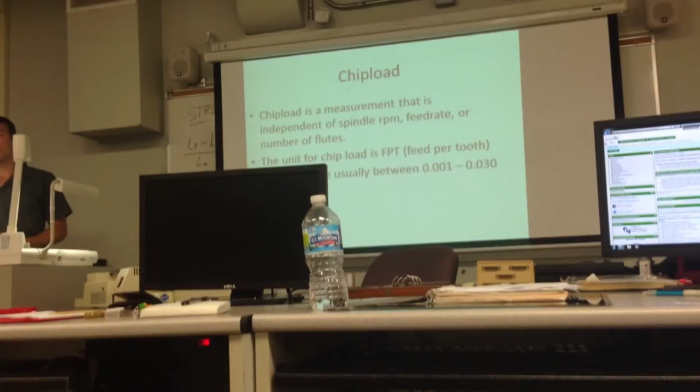So chip load is how big of a bite each tooth takes, right? So if I've got this cutter and it's got a chip load of 1,000, that means each tooth is going to take off 1,000th of the material. So if I turn this, it's got 4 teeth - if I turn it one time, it's going to take off 4,000th total, because it's based on the tooth. So basically it tells you how hard the tool is working. So obviously if I'm taking a 30,000th chip load with the same tool, it's going to be working a lot harder than a 10,000th chip load, unless your tool's huge - if you got a big tool, it's alright. Don't try to do that with a 1/8" cutter or something, you're gonna break it. Yeah, that would mean like one revolution. No, that's not gonna work.

So the chip load varies with the size of the tool usually, so you'll see that a lot in the charts. If it's a smaller tool, it's gonna have a much smaller chip load. Like if I'm using a 30-thousandths tool, I might not even use 1,000 - it might even be a half-thousandth chip load. But you got to remember that thing's spinning a lot faster too, so you can cut a lot - the feed could be a lot faster with a smaller chip load.

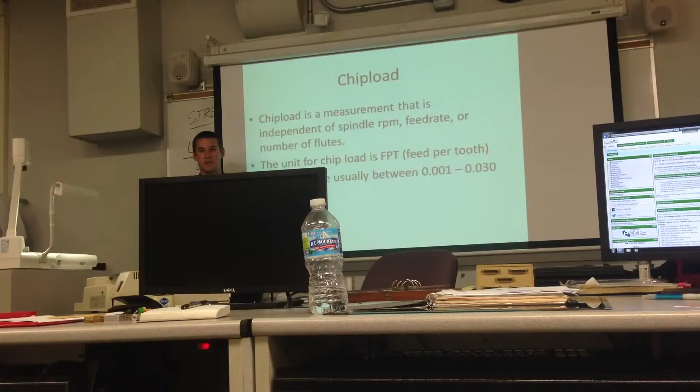No, the higher chip load means your feed goes up, because what's the formula for feed rate? I lost my paper in that computer lab. Feet per revolution? No, feed - inches per minute. It's the number of teeth, right? Number of teeth times the chip load times the speed, right? I don't know if it's in that order on whatever you're looking at, but that's usually what it is. So that means if my chip load increases, they're all multiplied, so that means my feed must increase. So IPM, inches per minute, is your feed rate - that's how fast you're feeding into the material. Okay, we'll get to that.

So surface feed per minute - what are we talking about here? What's the surface feed per minute?

You guys remember where I was talking about the cars going down the highway? So if I'm driving in my car, I'm going 60 miles per hour. My wheels in my car are spinning, right - say my wheels in my car are, I don't know, this big. There's the wheels in my car, and I'm going 60 miles per hour. Right beside me is a big old semi-truck - it's got a huge wheel, and he's going 60 miles per hour too. He's getting the same surface speed - we're going the same speed. And then I got this little smart car behind me, and it's this big, but it's still going 60 miles per hour. So this is what we're worried about - we're worried about how fast you're actually moving across the surface. So 60 miles per hour, that'd be what, 5,280 surface feet per minute?

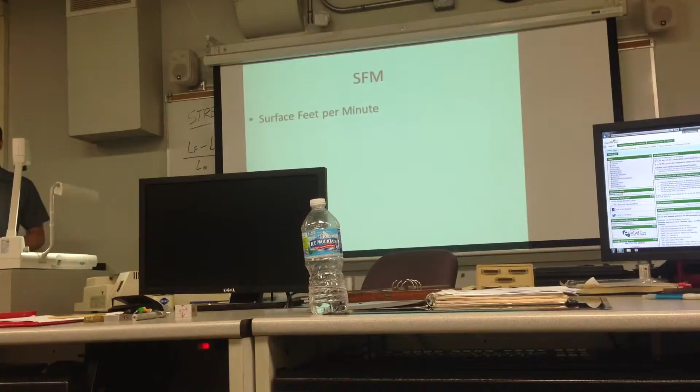So going back to that first equation, what's LL for again? We'll get to that, don't worry about it. We'll get to that. Okay.

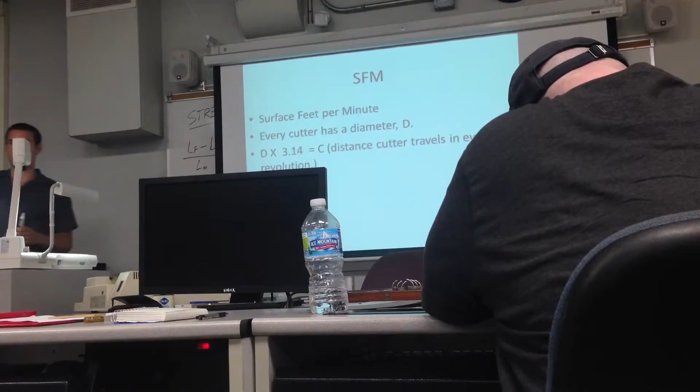So every cutter has a diameter, right? So that's our car wheels over there. We have 3 different diameters. And you multiply that by 3.14, you get the distance it travels. So we're talking about the rotational now. And the surface feet per minute is just how far the cutter edge travels in 1 minute. So you're thinking about that cutter edge traveling a linear velocity in 1 minute, and that's what the surface feet per minute is.

And you'll see on the chart anywhere from 20 surface feet per minute all the way up to 3,000 for some crazy materials.

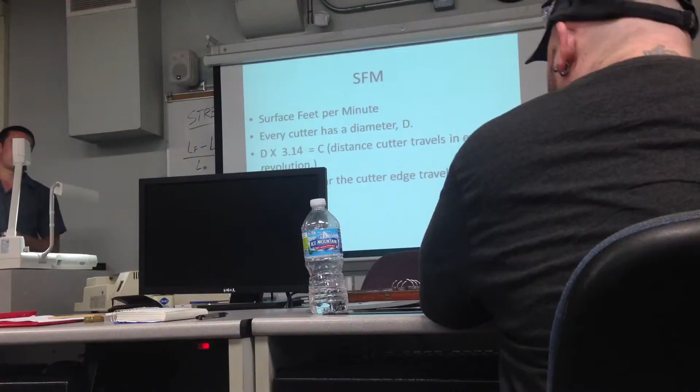Are we taking a break anytime soon? Yeah, after we finish this. Then that'll be the last time.

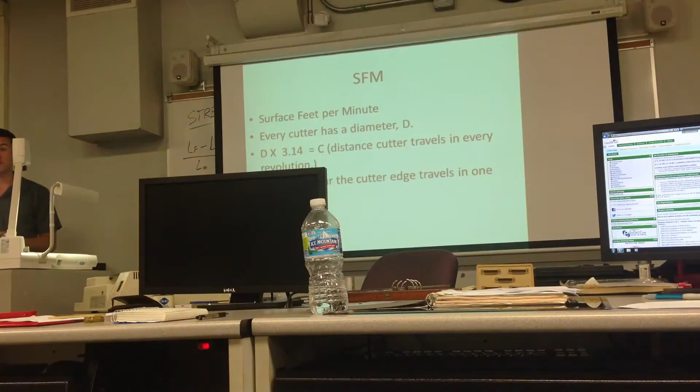Sorry, so just remember to think about that as how fast one tooth is moving across the surface. Just think of it that way. It's easy to remember, it's okay.

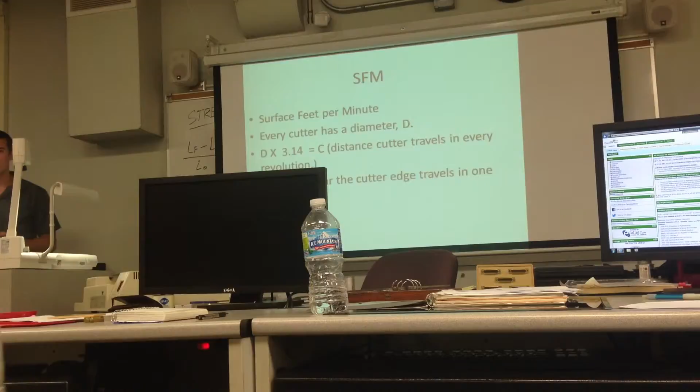So when it's on the lathe, that tooth, it's actually dependent on how big the diameter is of whatever you're cutting. Exactly. Okay, so I kept thinking it has to do only with the tooth. No, it has to do with whatever's rotating.

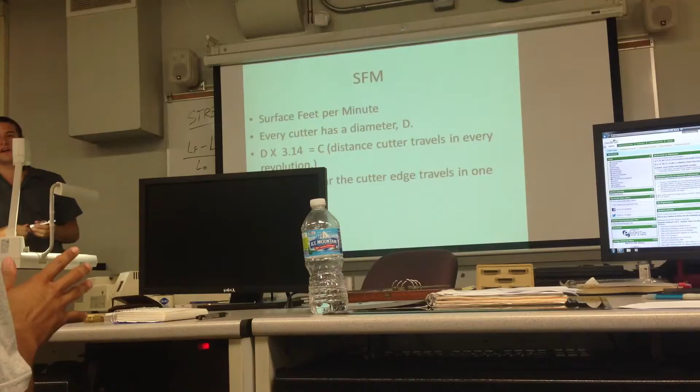Like that. That was scary. Thought the school was getting blown up.

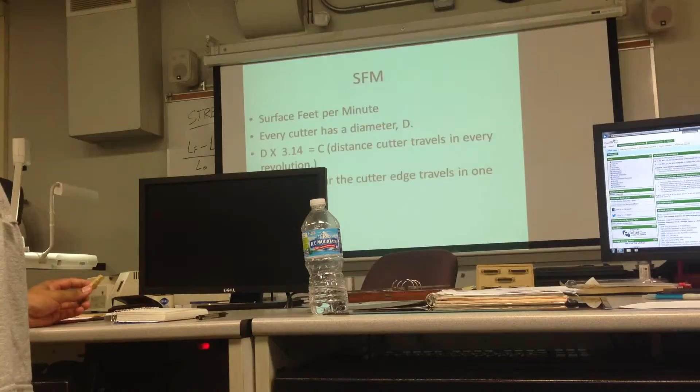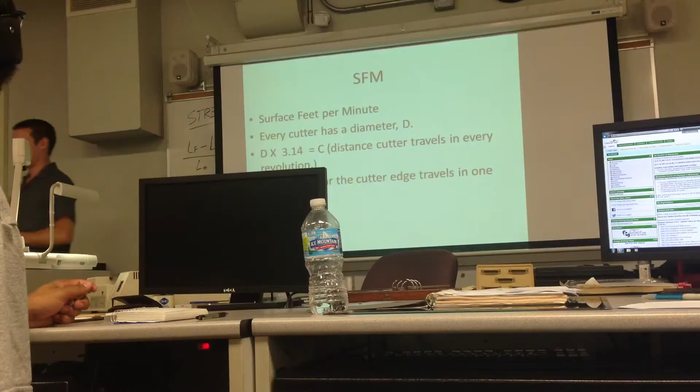So what's surface feet per minute? It's the speed that your tool is moving across the material. So if you were to think of it like a chisel, like I just got a chisel and I'm chiseling something, if I take that chisel and go fast, or if I go slow, that's what your surface speed is. So the faster you go, the more heat you have, right? The slower you go, you have a little less heat.

So if you look at this chart here, kind of hard to see, it's small, I get it, but that would have been nice. You have your surface speed per minute right here. It's going from 10 all the way to 1200, 2000, right? So 10 to 2000, and across the top you have diameters. And what you see happening here is like at 10 surface speed per minute...

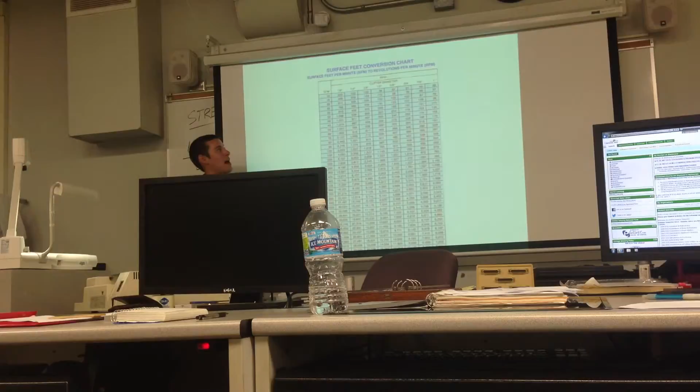depending on the diameter, your cutting RPM's going to change, right? So if I'm using a 1/8-inch tool at 10 surface speed per minute, it's going to be 305 rotations per minute, right? But if I go up to a 1-inch, it's only going to be 38. So the tool diameter has a lot to do with how fast you're spinning your tool. So on the outside, it's not going to be going as fast as if it were on the inside, surface-wise.

So that brings us to spindle speed, which is the RPM of your machine. So the RPM of the Bridgeport, the actual tool spinning, or the RPM of your lathe piece spinning towards you or away from you. And that is your surface speed per minute times this constant.

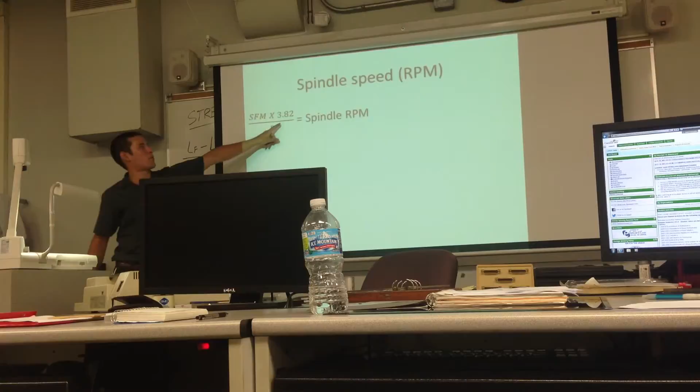I was trying to read into that thing too hard. Too much, man. So let's do an example here.

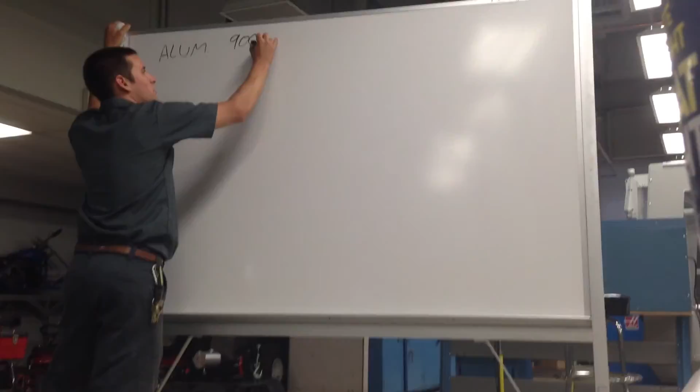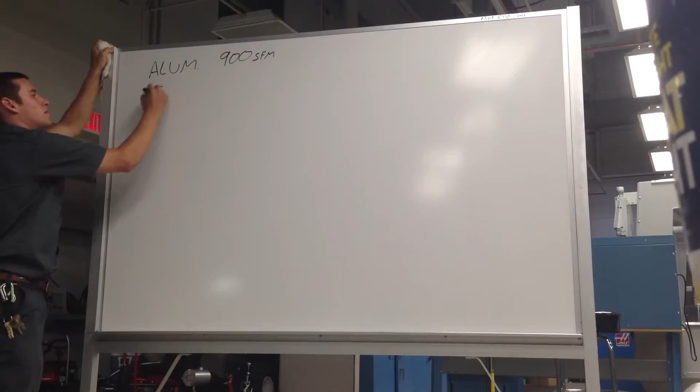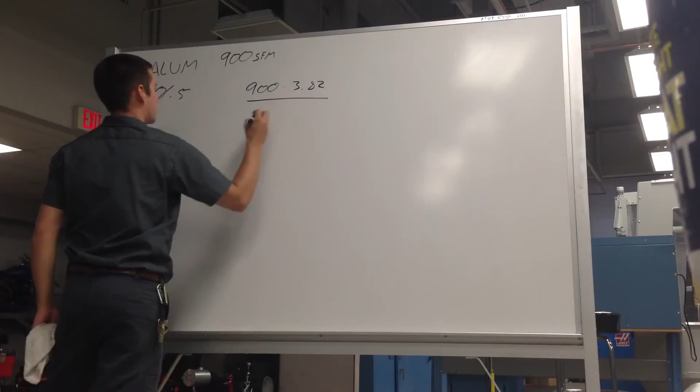We want to cut some aluminum. The cutting speed we looked up in the chart for our tool was 900 surface feet per minute. Let's say we're using a half-inch cutter. So all you do is plug it in: 900 times 3.82 divided by 0.5, and that should give you your RPM.

What is that? 6,876. That's all I got. 900 times 3.82 divided by 0.5. What'd you say? 6,876. Oh, I thought you said 68,000 or something. No.

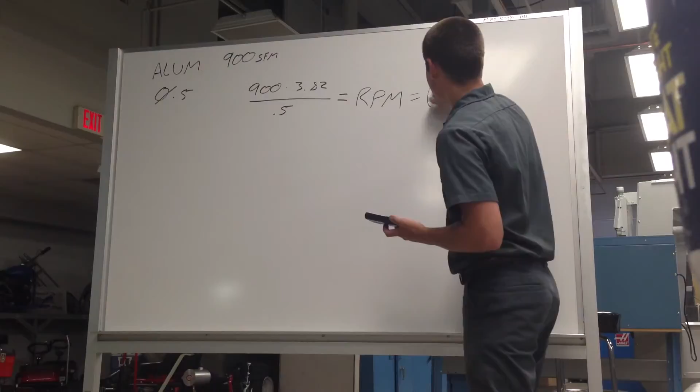Yeah, that's the same. So that means it needs to be spinning roughly 6,800 RPM, right? No machine in this class can do that. We were just talking about hooking up a car to the lathe motor.

I've seen people do that actually, down in Kentucky. They'll take their lug nuts and bolt on pieces of wood, and make art out of it. It's pretty crazy stuff. Very dangerous - they bolt something to their wheel and turn the car on. They had their car on blocks, took off the wheel, bolted a piece of wood on there, cranked it up with the gas, and had a bar in the ground - it was like a lathe basically. They were making bowls and lampshades and all kinds of stuff with wood.

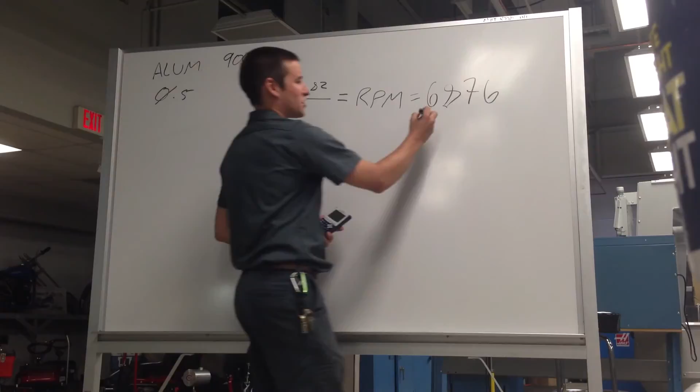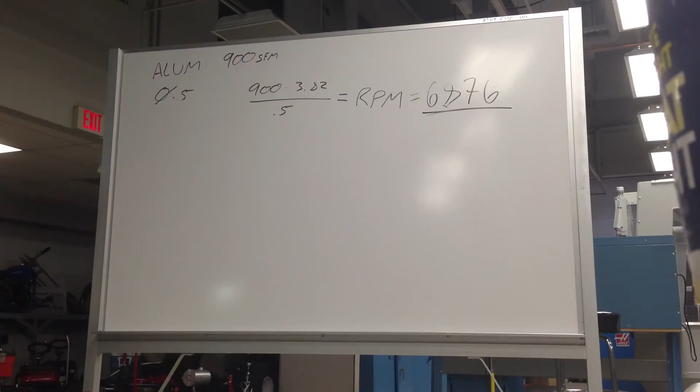So here's our RPM right there. That means I've got to run the Bridgeport that fast if I want 900 surface feet per minute, right? Obviously we're not cutting at 900 surface feet per minute back there - not with a half-inch tool, at least.

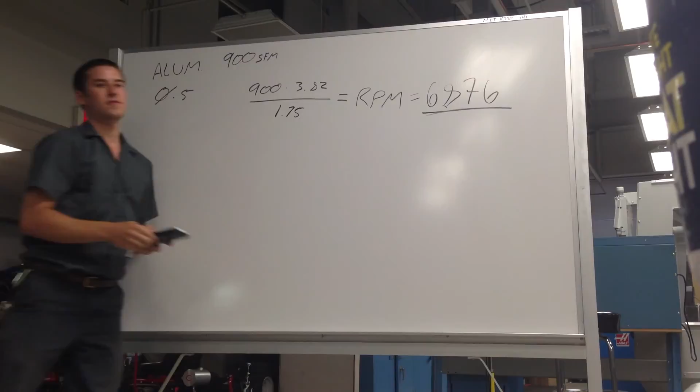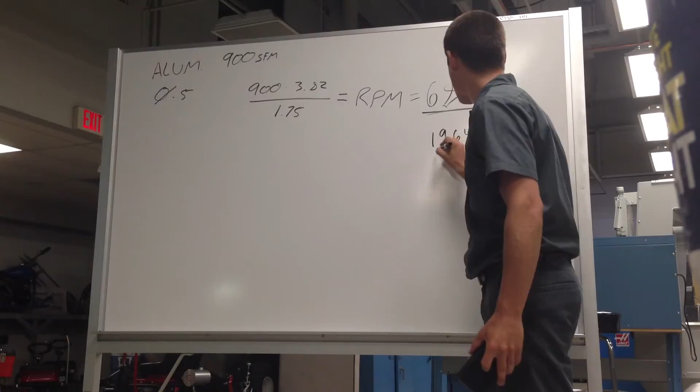So let's upgrade this - let's say it's 1.75. What's that going to come out to? 1964? We can't do the 0.5, we'll put it there - 1965 then. So you can see how much that dropped - a huge amount. That's because our tool got bigger, so the outside is spinning faster.

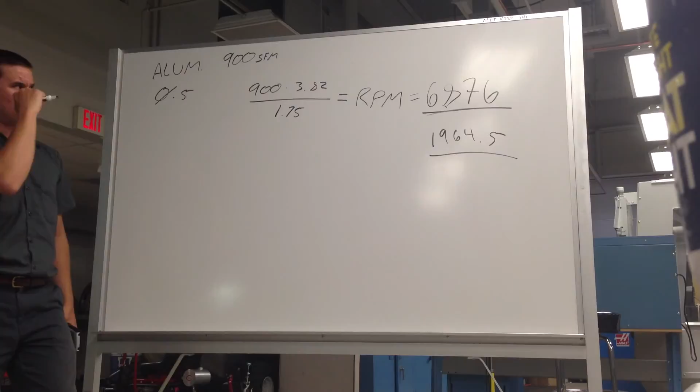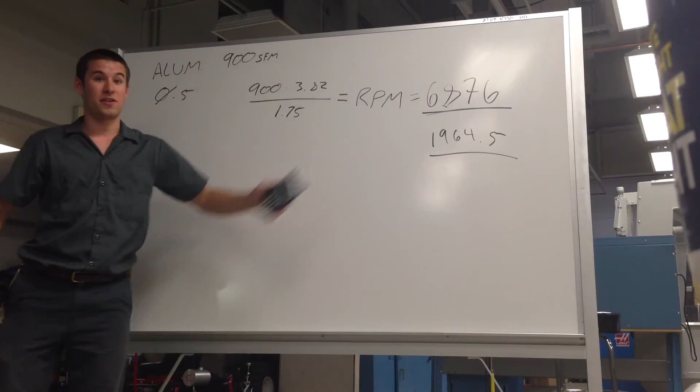We want the outside to spin at the same speed, right? So that means we've got to spin slower. That's a huge amount smaller - even if the whole thing... it's actually a factor of 3.5, 3.5 times smaller, or like 25% of the number. No, it'd be a factor... 350%, right? I'm looking at it backwards - yeah, it's 350%, that's right.

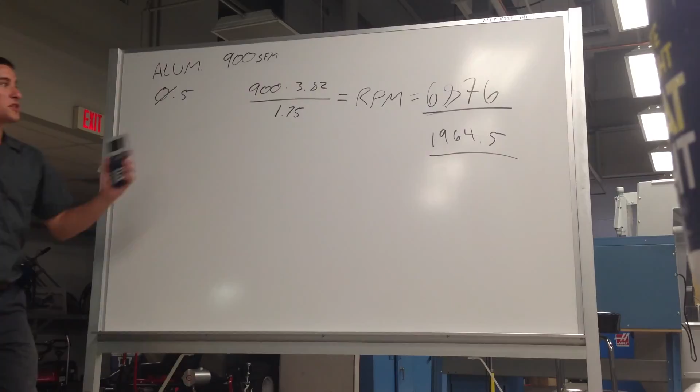If you're back on the Bridgeport and that thing only spins at 4,000 RPM, or probably not even that, probably 3-something, and you want a high surface feet per minute, you should probably use a bigger tool, right? That'd be a quick and dirty way to do it.

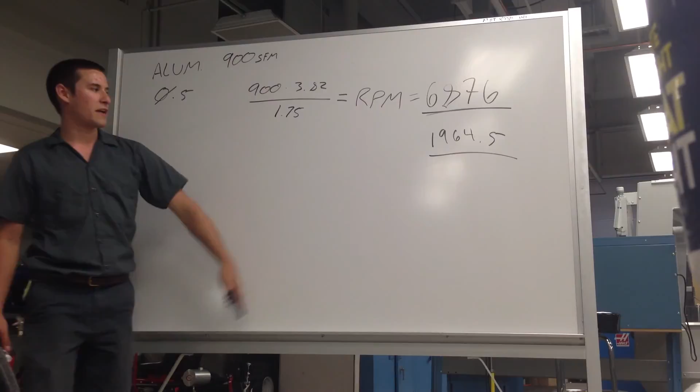So if I'm on the lathe, what's different about this? Not the tool, but how big the piece of stock is, right? So if I'm cutting something 1.75 inch, I'm good to go - I can run the lathe at that speed, no problem, and I'd be cutting 900 surface feet per minute.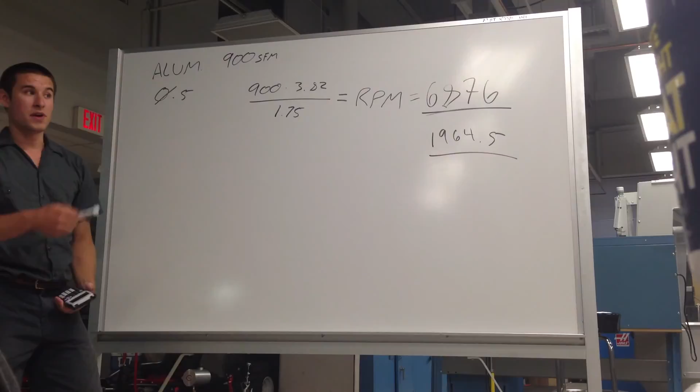So people actually measure this stuff out, they don't just throw it on there. On a manual mill, most people just throw it on there and go, because you don't really need to - you can feel it, hear it, see it, it's easy to adjust. Nobody really calculates it; guys who run manual mills know this stuff by heart. I never calculated speed and feed for manual mill unless it was something really important.

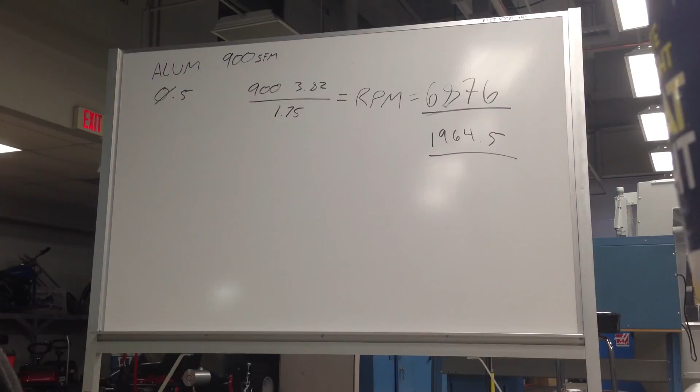CNC though, it's crucial - you've got to be perfect, right on, or your parts are going to turn out like crap. So that's why this is important, because we're going to start doing CNC right after welding.

What are we doing welding? Welding next week. Cool.

So these are the only two variables you have here: the cutter diameter and the surface feet per minute.